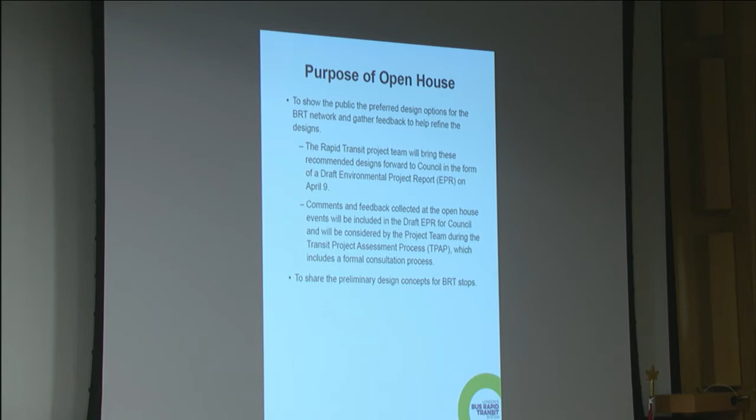We're compiling the comment sheets from these open houses, and we'll be including them as part of our presentation to council in April as part of the draft EPR. As far as how those sessions went, I'd say the tone was very respectful, and the questions and comments we got were very constructive. So we're really happy with how those sessions went.

We've included a timeline—this was a board we added to our collection for the last open house, really to give people a sense of where we've been and where we're headed. There's still a lot of work to do on the EA into detailed design, before we even get to the construction phase. A lot of people are always asking us, well, when are you going to start construction and where are we now? So we wanted to put something together that was easy to digest and helps people understand where we sit today. I'm not going to go through it in detail, but all of these boards are available on the SHIFT website if people want to dive deeper into some of the details.

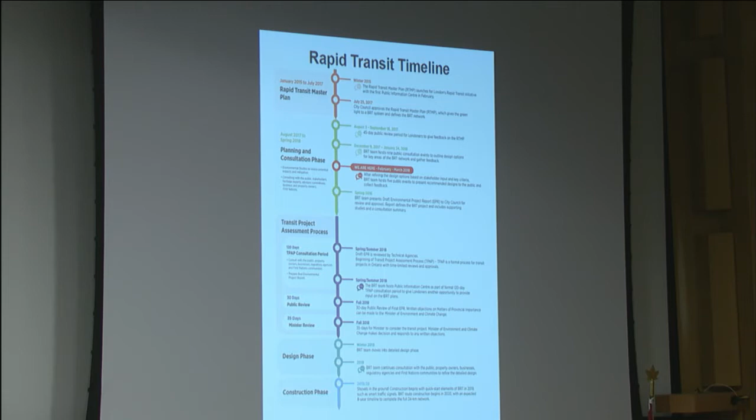We touched on some of those core key messages around our project and citywide benefits, like a 35% increase in transit service, reduction in greenhouse gas emissions, some of our reduced or deferred road widenings that can be pushed off because of doing this project, how many people will be able to walk to work or home from a BRT route or stop, and the fact that we're revitalizing 24 kilometers of our city roads with this project.

We spent a lot of time—we always go back to the basics when we have our sessions—on what is bus rapid transit: the idea of dedicated lanes and how that brings the reliability and frequency of this service, how we're able to make better connections with local service, integrating our local service with rapid transit to improve service citywide, and also the fact that as part of our project, we're implementing smart traffic signals, which will help reduce congestion and smooth traffic flow across the city, whether you're on an RT corridor or not.

We also like to touch on some of those other core features about bus rapid transit: modern design features, the fact that our buses and BRT stops will be accessible, with real-time information, attractive shelters, and good pedestrian and cycling connections for your first and last mile, whatever your situation is, integrating those designs into the neighboring communities.

We talked about our two corridors, where they go, the two routes, the northeast route having a 5-minute separation between buses and the southwest having a 10-minute headway on buses.

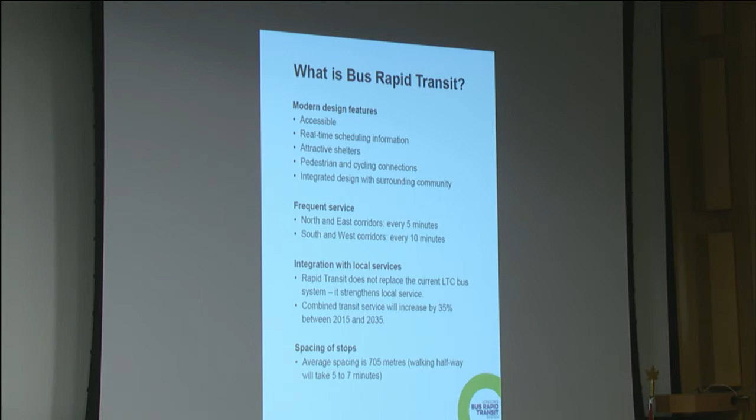We touched on local service integration, that ability to reinvest service currently on those RT corridors into other areas of the city, allowing us to bring more buses to more places more often. So we're improving service to areas that may be underserved or not served in the periphery of the city by redistributing that resource.

We also talked about stop spacing, and the fact that with BRT we're running essentially an express type service where we have larger spacing of BRT stops. On average it would take you about 5 to 7 minutes to walk to a BRT stop if you're standing as far as you could at the midpoint between two stops.

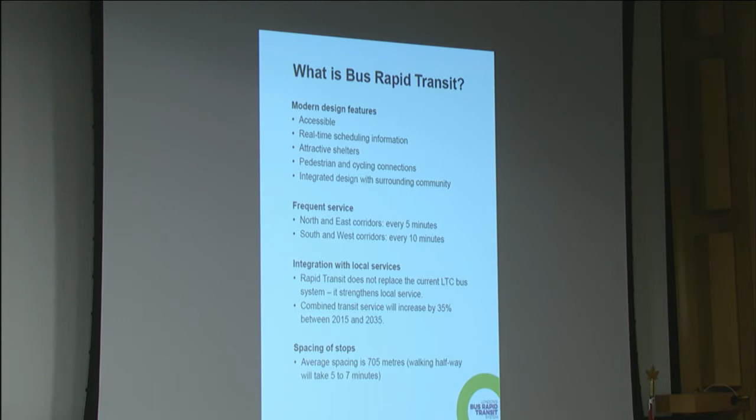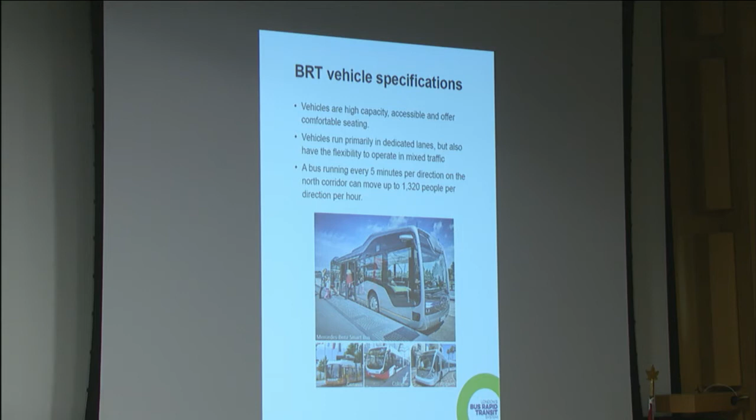We talked about our BRT bus specifications. We're currently going through a study with CUTRIC, a group that looks at bus technology, to review what our technology will be, whether high-efficiency diesel or electric. But the idea is that our buses will be modern, high-capacity, fully accessible, with comfortable seating. They'll run primarily in dedicated lanes, and a bus running in a dedicated lane at a 5-minute headway has the capacity to carry almost 1,300 people per hour in one direction.

Touching back on some of the consultation we did in December and January, we had 9 sessions in total to allow the public to comment on the different design options for configuring routes along our BRT corridors. We had almost 800 attendees at those sessions and 267 written comments, plus a lot of discussions around the boards, which was great to hear. We continue to get comments via email, and we had a different session with surveys where people could comment on the stop features they'd like to see at BRT stops. So there were lots of ways people could feed into this process.

I wanted to touch on how we arrived at our recommended design options. Each of those design options is rooted in the basic core principles set out through the Rapid Transit Master Plan: city building, community revitalization, transportation capacity and mobility, operational viability, and fiscal responsibility and affordability. Those were our overarching principles.

In addition, we had over 25 different technical criteria around environmental and cultural heritage issues, among others, that we had to balance in determining our preferred options. And of course, public and stakeholder input was also critical in how we got to the recommended designs we're presenting today.

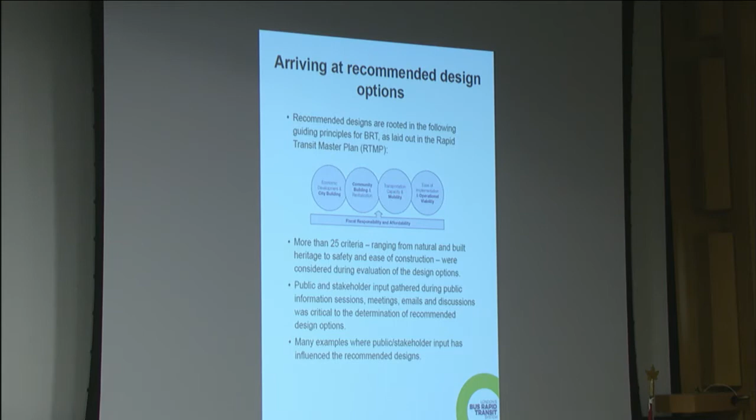At our previous session, we identified 9 key focus areas where we were looking at different options or alternatives for how to configure the BRT routes. Those are listed on the screen. So we're looping back on each of those areas at our current open houses from last week to say what was the recommended design in each area, and we also provided some early concepts for our BRT stop designs.

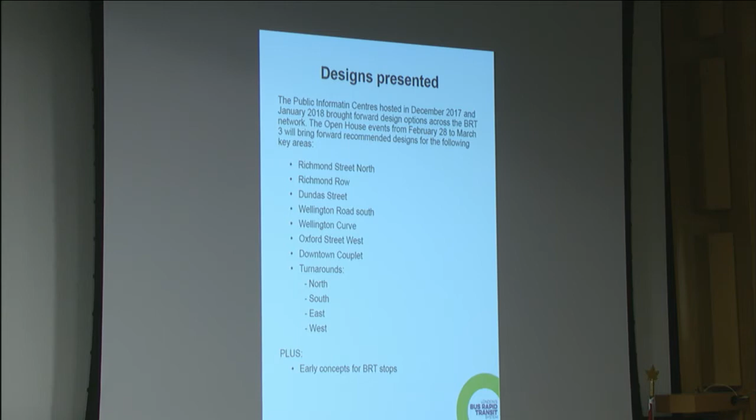That's the end of the preamble. I went through it a little quickly because I know we have a lot to cover in terms of the actual recommended design options. But the information is all available on our website if people want to go back and look at it in more detail.

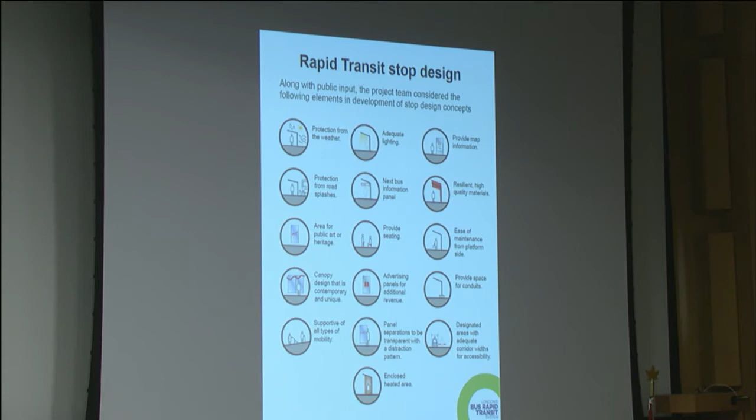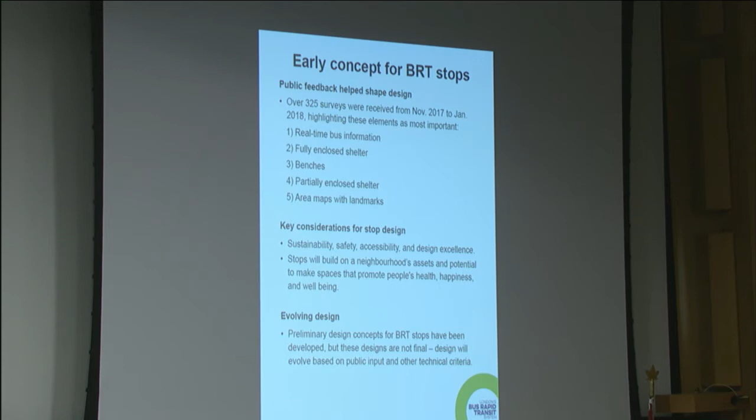Next, I'll walk us through some of the information we presented about rapid transit stop design. This board gives an example of some of the many features we've considered that will be part of our designs going forward. We had a public workshop on stops and streetscapes back in mid-November, where we asked the public what features are important to them for these stops, and how we should work to fit those into the surrounding neighborhoods.

So things we heard from the public in terms of priorities: real-time bus information, fully and partially enclosed areas within those bus shelters, benches, and those comfort sort of features that are important to people. That's what we saw float to the surface in terms of key features they were looking for.

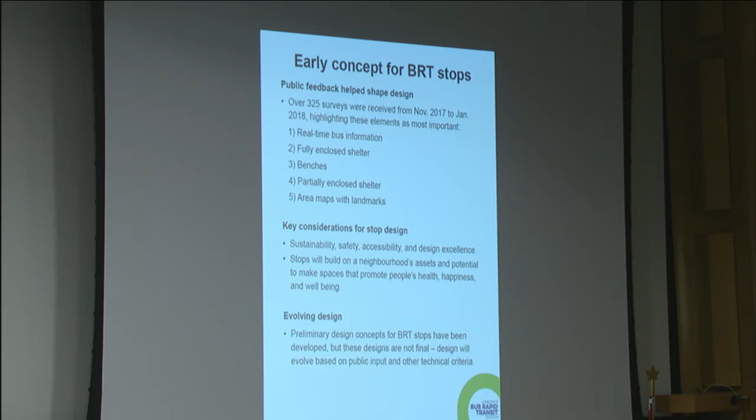We also heard a desire to make sure the stops we design are sustainable, safe, and accessible. People were really stressing the importance of having design excellence in those and how they fit and integrate into the neighborhoods. We also wanted to talk about how these designs will evolve over time.

So we have some early concepts, and we were trying to determine what our needs are from an EA perspective - what are the widths of the sheltered platforms, where would we put passenger information, maybe ticket vending, offboarding and onboarding areas, those enclosed areas we talked about, and making sure they were fully accessible.

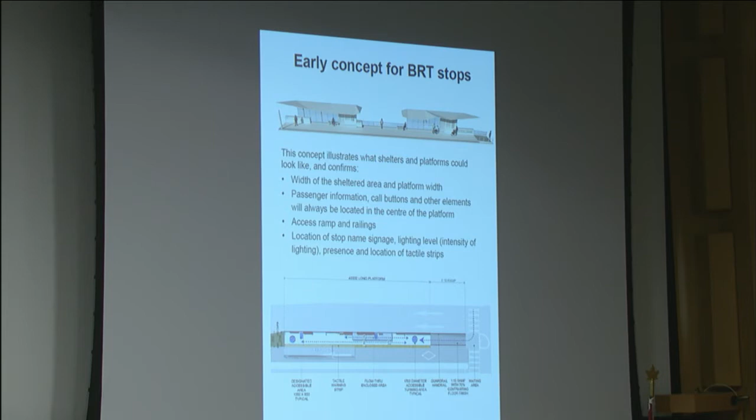And again, these designs will evolve. As we move forward, the intent is that BRT stops will be recognizable as a BRT stop across the city, but we can still customize them to fit into the neighborhood - things like materials, colors, finishes on the platform surface or the walls. I'm looking for opportunities to integrate art or information that reflects the cultural heritage or history of a given neighborhood, but essentially that canopy length and size and those key features will remain consistent.

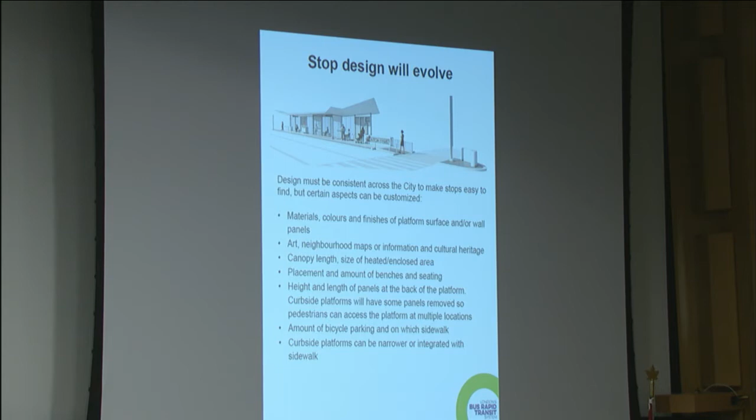Going forward, we want to engage Londoners and make that a fun process on a neighborhood by neighborhood basis to engage people in what these stops will look like. One thing I noted at each of the presentations last week is that I promise we are not going to build 38 beige stops. This is really a blank canvas for what the stops will look like when we move forward.

So with this, I thought I'd start moving into the corridors. I'm going to take us through our recommended designs, corridor by corridor. We'll start with north and then move our way around the RT routes. For each of those 9 key areas, I'll walk through our recommended design, what we heard from the public at our different sessions, and the reasons why we recommended that design.

So for Richmond Street North, from Oxford to University Drive, we're recommending 2 center running BRT lanes with 2 lanes of general traffic, one northbound and one southbound. Things we heard from the public included a desire to minimize the impacts to trees, driveways, and properties.

We had mixed opinions on curbside versus center running depending on perspective. I think in most cases, when we took time to talk to people about center running and how it works, and helped them understand how you get to the platform and how that system would operate, a lot of people really came to see the benefits of a center running system.

We also heard concerns from the public about how traffic would be impacted by this proposed design. Again, that's something that we looked at, and so we recommended this design.

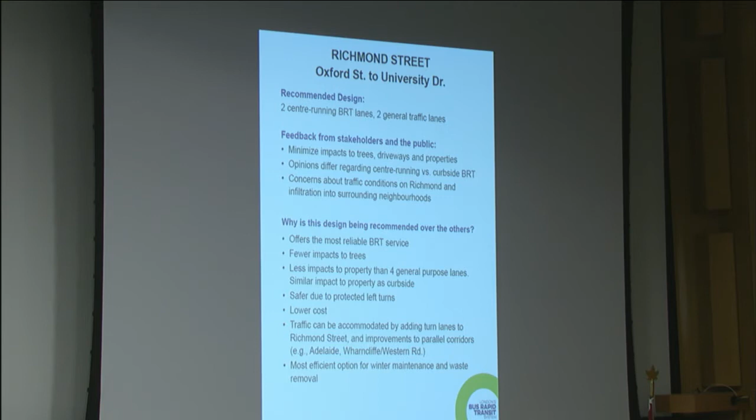It provides the most reliable BRT service. Center running is always going to give you that most reliability because those lanes are protected from any vehicular traffic crossing through them except at signalized intersections. So you maintain that true dedicated lane that allows for reliability and the ability to provide increased frequency.

This design option has fewer property impacts - fewer impacts to trees, and fewer individual properties affected. We've noted, and heard from other municipalities as well, that a center running system is safer due to the ability to provide protected left turn lanes at those signalized intersections. This design was also the lower cost of the different options.

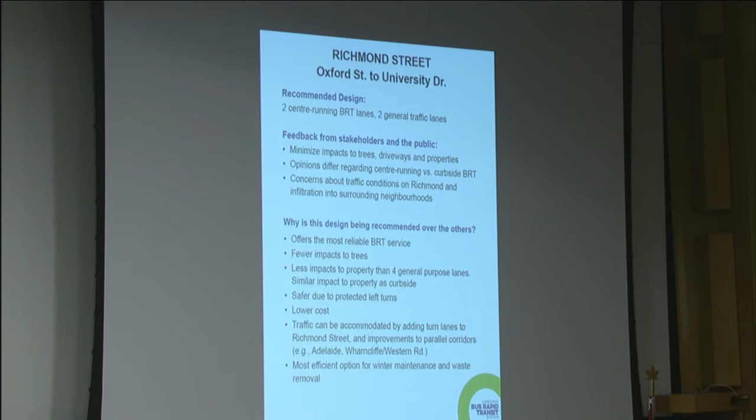We also did some modeling, which I'll dive into a little deeper, but we showed that through parallel improvements on Adelaide, on Western, Wharncliffe, and through the campus, we'll be able to accommodate the traffic that will be on Richmond with those improvements, as well as providing other turning facilities and bus bays along Richmond.

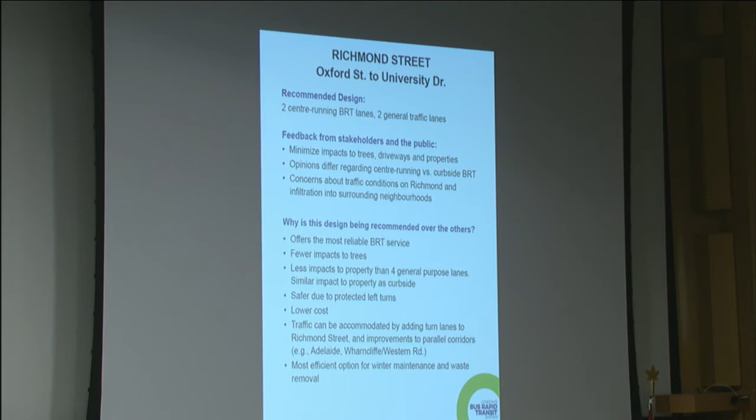One other point is that center running is the most efficient option for winter maintenance and waste removal. So those factors played into our decision to go with this recommended design.

This is the cross section we're showing. In concept, you can see we have our center running BRT lanes down the center of the road, separated by a 1.5 meter wide concrete median about curb height. It's not a tall barrier like some people thought—just a curb height median like you'd see on any separated road.

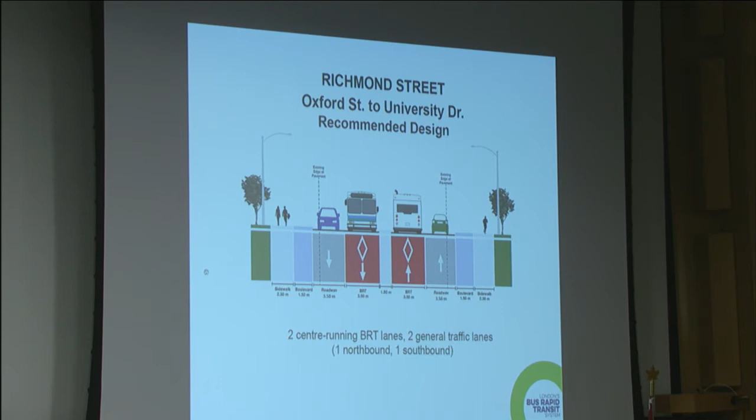So we've got our 2 center running lanes, median separated, and then 2 lanes of general traffic, one northbound, one southbound, a boulevard area, sidewalks, and additional space for trees. As we get into detailed design, we'll be working in this area to mitigate impacts where we can and try to keep our tree impacts down as well.

I mentioned I'd dive a little deeper into some of the traffic modeling we did. We wanted to demonstrate how traffic would respond to the changes we're implementing and recommending through our system. To do that, we needed to look at the entire traffic area from the north, so we modeled using a computer simulation the area from up near Masonville right down to south of Oxford Street.

The goal was to capture all of the parallel improvements happening in the area. Some examples are removing the bottleneck on Western Road where the rail crossing bridge work is underway right now. We're also planning, on Adelaide Street, to advance a grade separation or underpass of that rail system, which will again remove a bottleneck and make Adelaide a more amenable option for people coming from the northeast down towards the corridor.

Another parallel change in traffic patterns going forward is that with Western's master plan for their campus and open space plan, they are planning a car-free scenario on campus. Also, when we bring BRT through the campus and over University Drive, there will no longer be vehicular traffic cutting through the campus from that area. That again is going to affect the volume of vehicles traveling on Richmond.

We then combine that with the fact that, as part of our design, we'll be incorporating right turn lanes and left turn lanes at all signalized intersections and side streets. Where local service feeder routes are feeding people into the BRT corridors on Richmond Street, they'll be stopping in bus bays so they're not bogging down the through lane of traffic. So essentially we were providing one lane of general traffic in each direction, but that lane will be unencumbered by the many things that bog down Richmond North today.

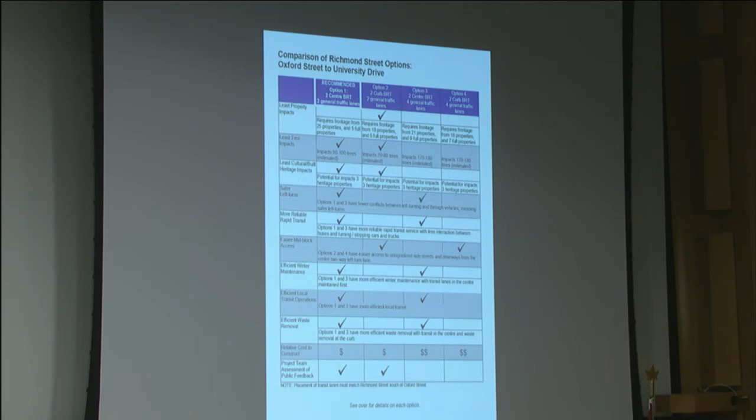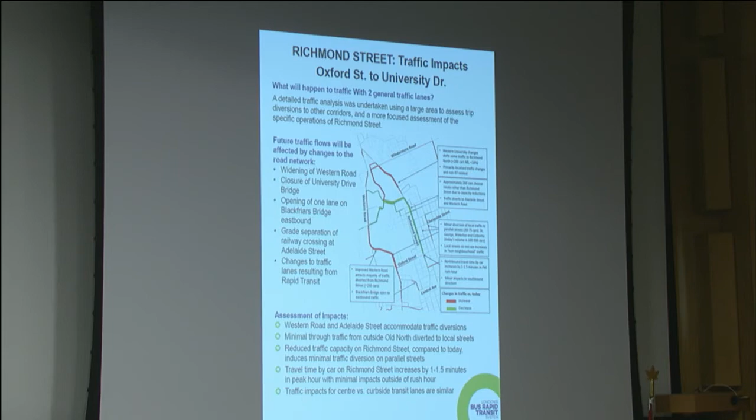Okay, I'm going to move forward. Let's head south down Richmond Street and now talk about the portion of Richmond from Central Avenue to Oxford Street West, which would basically be that Richmond Row area. In this area, we're again recommending 2 center running BRT lanes with 2 general lanes of traffic.

We heard from the public concerns about pedestrian and cycling safety, traffic capacity reductions, and on-street parking and loading areas, which was important for the businesses along this stretch of Richmond. We need to address business impacts during construction, which is something that as we move forward with our project, we'll be having strategies and communications plans for how to manage construction when we work through these busy commercial areas.

We had questions about the distance between BRT stops, and we also had questions about how we'll be managing the crossing at the rail at the CP rail crossing there and how we'll deal with potential conflicts with trains.

So in terms of the reasons we recommended this option, again, it offers the most reliable BRT service. We are separating BRT from those curbside activities that are common in this type of Main Street area.

We've also looked at the potential to accommodate some on-street parking and loading areas in the form of bays. With the center running option, we were able to maintain on-street parking along Richmond Row, as well as some loading bays. With the curbside scenario, those would have been gone with the buses running along the curb lane.

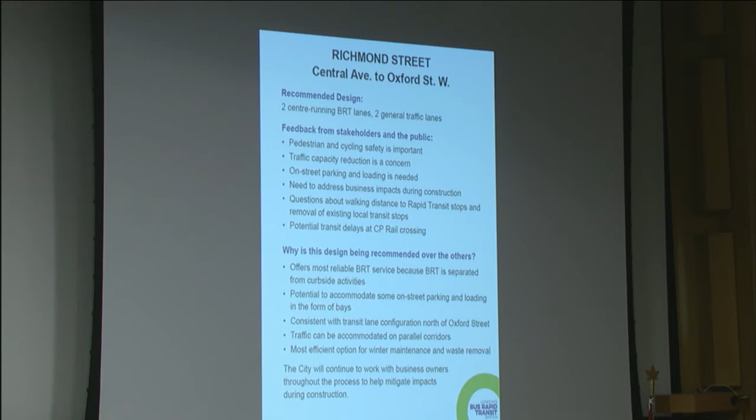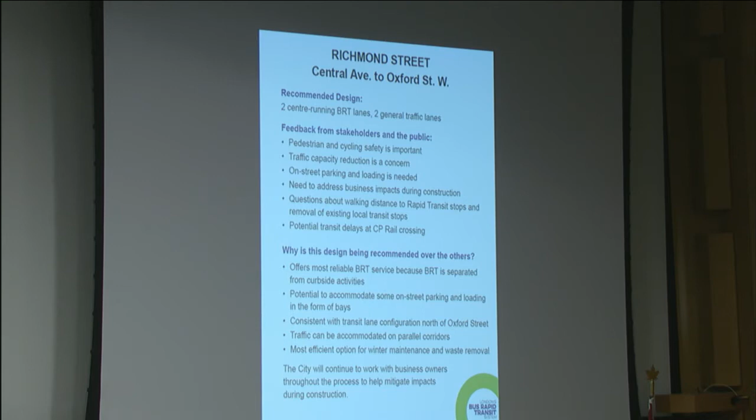We've also noted that traffic can be accommodated on parallel corridors. We have a grid system to the south, which allows other ways for people to access businesses along that section of the route. It's also the most efficient option for winter maintenance and waste removal, and center running is a safe option as well.

So here's a cross-section for the Richmond Row section. We've got center running separated by that curb-height, 1.5 meter median. Just to stress again, the reason why that median is important to center running BRT is...

If we didn't have that there, inevitably people trying to make left turn movements would use those BRT lanes as a shelter or refuge to wait for an opportunity. We'd have cars stopped in those lanes, buses stopped, and all of a sudden our system isn't rapid anymore. So we need to maintain the integrity of those BRT lanes, which is why we have that center running median, but then we offer left turn opportunities at the signalized intersections.

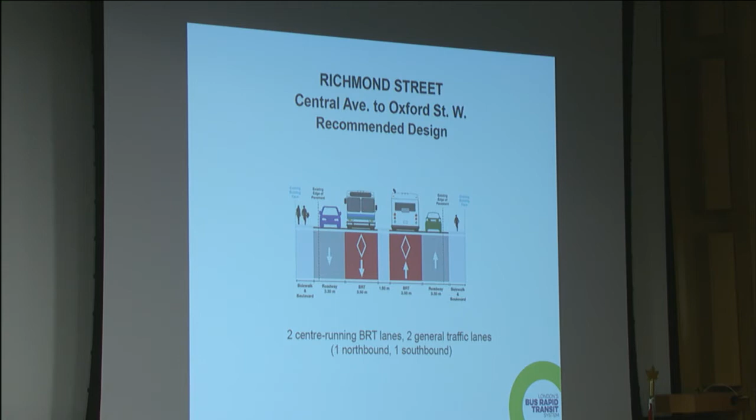So I'm going to flip over to the other side. Here we go, and I believe, do I have another rendering? Nope, that's the Wellington South. Okay, we'll go back over here.

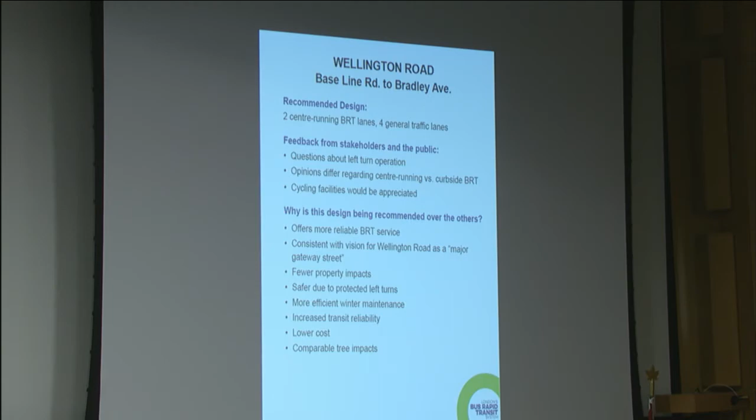Okay, so that was a summary of the Richmond North. I'm not sure, did we want to take questions corridor by corridor as we go and take a breather to see if there's some things I can answer? I think that's the best way to do it, it's such a big presentation.

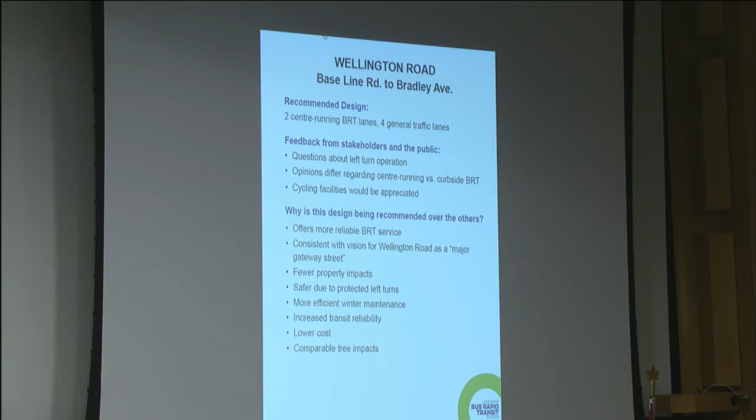With center running, we'll be able to allow priority signals at each intersection where people making a left turn or U-turn to loop back and hit a mid-block access can do so on a protected signal, where only the left turn and U-turn movements have control of the intersection.

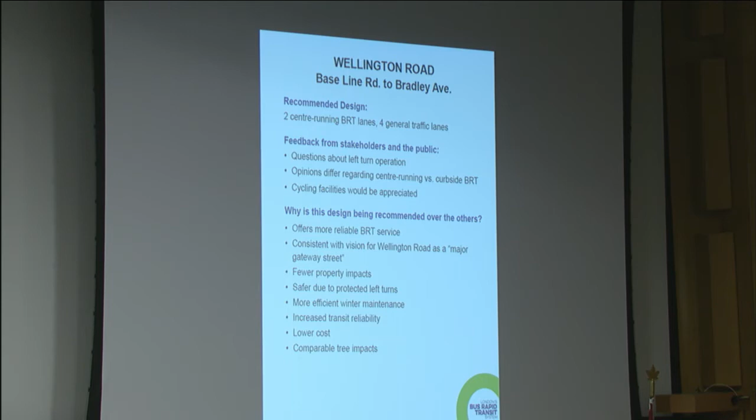This brings mid-block left turns together into a safe, focused area. We've seen in places like North York an actual reduction in accidents along center running BRT lanes because of how the turning movements are brought together into one safe location. It's also more efficient for winter maintenance, has increased transit reliability, lower cost, and tree impacts for both center and curb running were comparable in this scenario.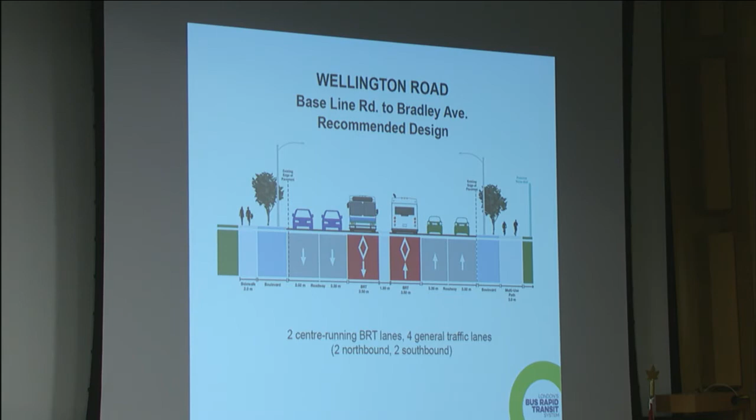Next I'll walk us through the Wellington Curve, the area of Wellington from south of the Thames River to Base Line Road. In this area we looked at 3 options, trying to balance the impacts of widening this road to maintain 2 lanes of traffic in each direction. In the end, we looked at widening to the east, widening to the west, and straightening out or lengthening the curve, which is currently below design radius.

That's why you often see trucks hopping curbs or people floating out of their lanes a bit when coming around that corner too quickly. Our recommended design is to straighten or lengthen out that curve to get it closer to design radius and improve the safety.

What that also does is it balances some of the property impacts a little bit on the east and a little bit on the west. What we heard from the public was requests to minimize impacts to St. Andrew Memorial Church, and questions about the city's process for addressing property impacts, because we are impacting some properties quite significantly in this section of the corridor. We had differing opinions on which way to widen, east or west, and our recommended design balances that between the two sides.

People did comment that the curve is currently not to standard, and they noticed it. So why we recommended this design: we're making traffic safer by increasing those horizontal curves, and also providing protected turn lanes as we are in other parts of the corridor with center running.

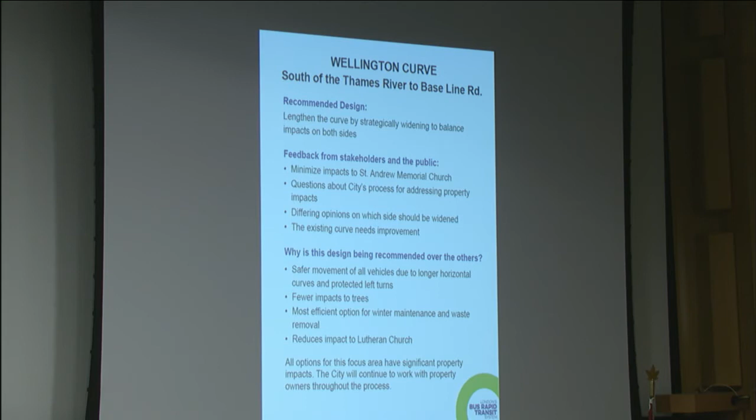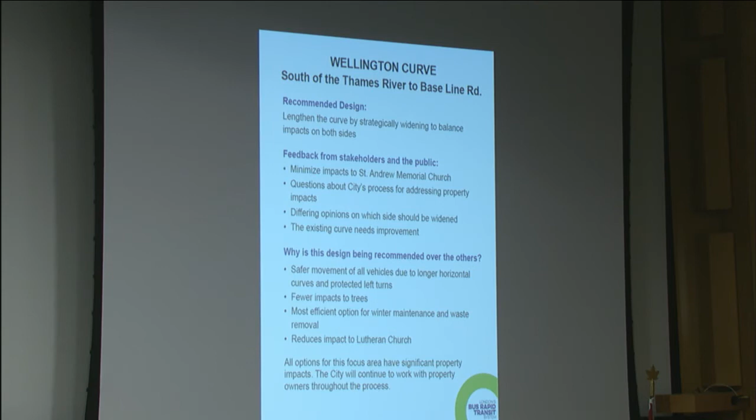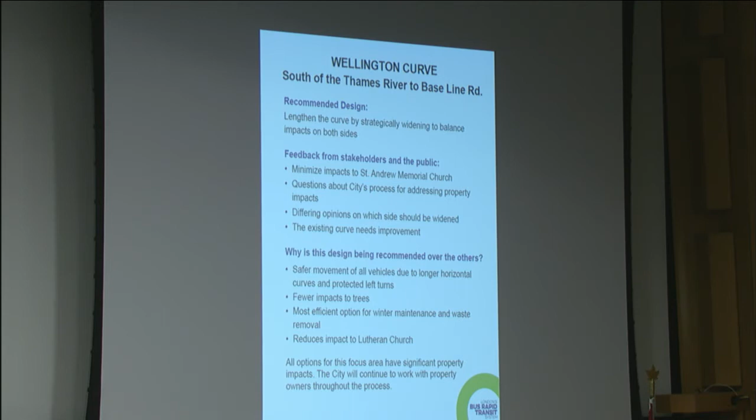This option had fewer impacts to trees, and it's also splitting the difference from a grading perspective. For those who know Wellington Curve well, there's the Anglican Church as well as the Lutheran Church right in that corner. Redeemer Lutheran Church is already sitting on a bit of a retaining wall, and if we widened more to the west on that side, we would have impacted that, driving it back and requiring a significant wall to match grades on that side. So we're balancing property impacts, grading impacts, and tree impacts to try to thread the needle through this section and find the best design we could.

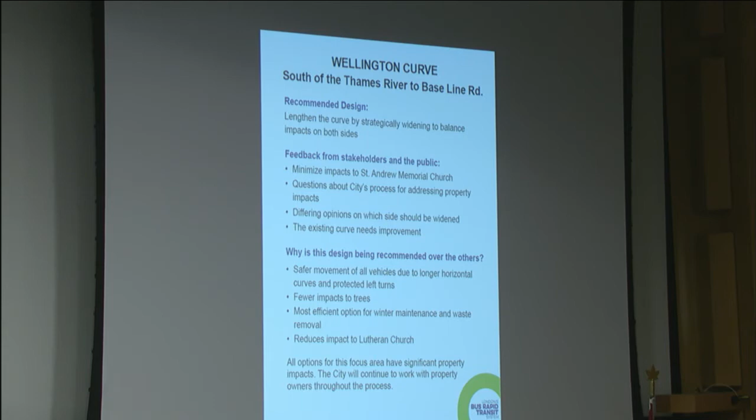Here's another cross-section for Wellington Curve. It's really the same cross-sections we saw to the south, but this example shows what a cross-section would look like through an intersection, with some turn lanes. We've got our two center-running BRT lanes separated by a median, and a left turn lane to one side, so at a signalized intersection this is where people would have the protected ability to make left and right turn movements.

Is that me? I'll just pause a second till we get our screen back.

There's the left turn, and what you see at these left turn intersections at a signalized intersection is almost a shadow area on the opposite side, which balances the left turn coming from the opposite direction of traffic. Those are areas where we can look for opportunities to include landscaping in the corridor. We then have our two lanes of general traffic, northbound and southbound, and our sidewalks again.

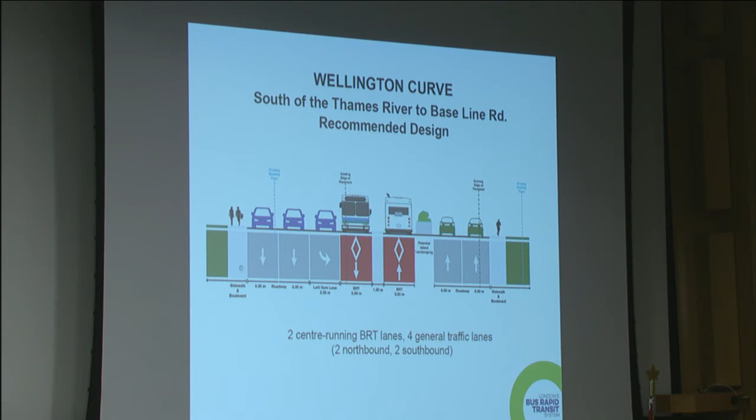For the south turnaround, we've recommended combining the platforms for rapid transit and local service at the White Oaks stop. I had a rendering earlier showing the last BRT stop, which is an on-street BRT, and I'll point to it on the map here. We've got White Oaks Mall with the BRT stop located on the road out there. One of the things we're doing in this location is consolidating the local service and the BRT to make transfers at that stop. Because those buses, both local and RT, will continue southbound through mixed traffic to turn around and head back north, it makes sense to bring them together at that center-running stop, so people can disembark from a local bus, wait for their RT bus, and continue on to their destination.

As far as turnaround options, we've shown two options in this area. One is an on-street option where buses continue in mixed traffic down to Holiday Avenue and use an existing signal located at the Old Navy Plaza. That allows buses to have a bus-only signal to turn them around and head back north. We'd be looking at including a driver facility in that location, as our sort of interim, implementable option using existing road allowances.

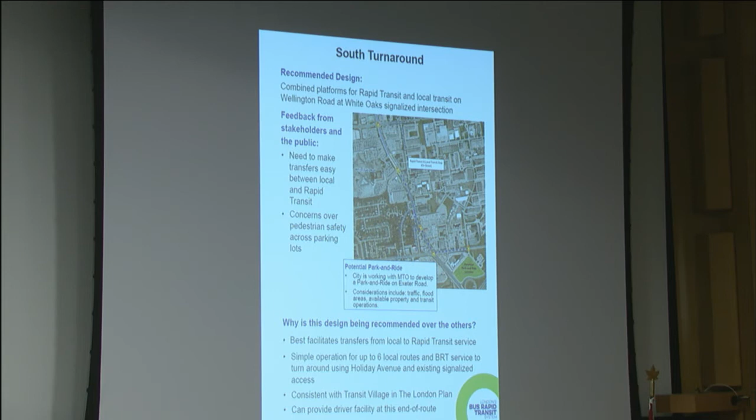We've also been working together with partners down near Exeter Road, next to the OPP dispatch, to look at options for a park and ride. That's something we're still considering. We're working with MTO, Hydro One, and we own some land in that section to look for options that could come to fruition, where we'd be able to turn the buses around and also have an area for people to park and get onto the system.

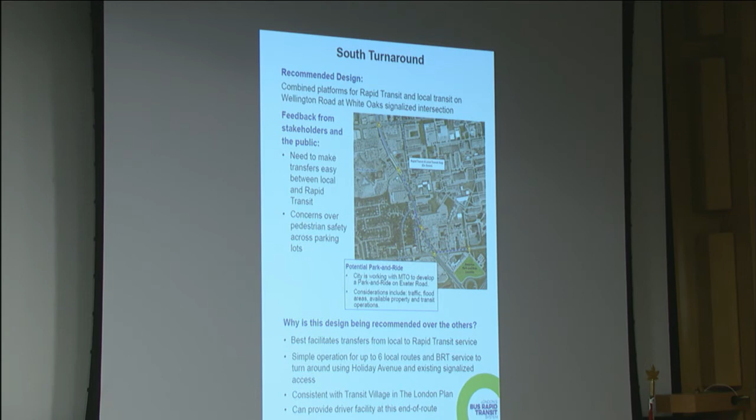If the chair would indulge me, just a question. I'm a little confused - was it 1.8 meters between the median between the two RT lanes? Is that right, or 1.5? And at the point where there's a platform or a stop, I would assume that's wider than that. Would that not be true, or is it adequate with 1.5?

It's not even 8 feet. Sorry to use the imperial.

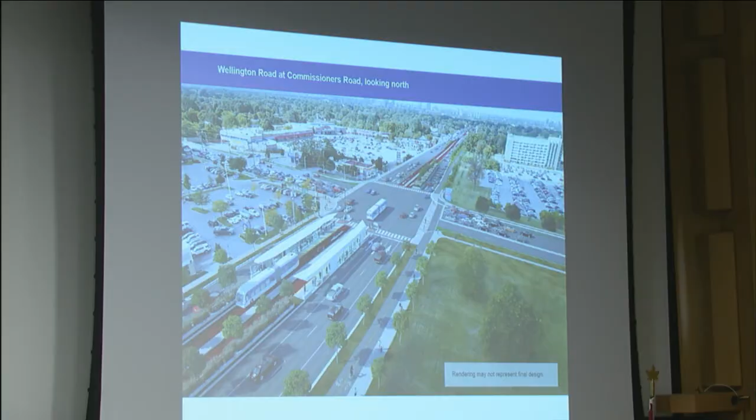Okay, any further questions? Councillor Van Holst? Thank you very much. Just a comment about this particular intersection. I had some discussions with residents today about the crosswalk buttons, and we might have to make a little change here regarding those.

I do really like the center lane running when it comes to the ability for a resident to get across the street. If people are slow moving, the opportunity to take two cycles to get to a middle safe place and then continue is great, because that's a long distance to travel. But I understand with this intersection, if you were at the gas station and wanted to cross over to the property on the southeast, you would hit the button, but by the time you got to the southwest corner you'd have to wait another cycle to push the button. It doesn't always give you a pedestrian light to cross, so I'd assume that would be the case here.

But I know people have said they tried to hack it - they would push the button at the gas station, and then just before they crossed, push the button to go across Wellington as well. When they got to the other side, it was only the pedestrian signal on the north side that was available to them. I'm sure those will all be timed out, but it seemed to me that's something we'll have to look at as well.

So here's a cross-section for Oxford Street West, with 2 center-running BRT lanes. We have a 1.5 meter median running down the center, 2 lanes of general traffic in each direction, and sidewalks on both sides with some room for the boulevard. As you can see, we get pretty tight through the section from Platts to Wharncliffe Road, and we are impacting some properties in this area.

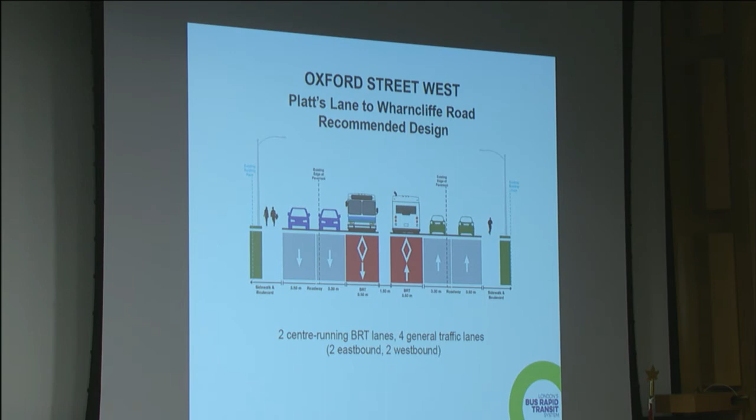Okay. I didn't have a rendering for that.

I'll move on to the west turnaround. This is another example of how we'll be going from mixed traffic past the last stop of the BRT. Dedicated lanes will end at Wonderland and Oxford with near side stations, I believe—actually, I'll double check the rendering on that. I'll see if I can.

Is it possible to switch over?

If everyone can see that rendering on the screen, there's a rendering of Wonderland at Oxford. We've got far side stations, these are the last BRT stop along the west leg of the corridor. Beyond that, if you look to the west, you can see the fire hall there, and we've opened things up to allow for access to the fire hall. Then those dedicated lanes taper out and the buses enter mixed traffic to continue westward to the Capulet Lane turnaround.

And if we can flip back again.

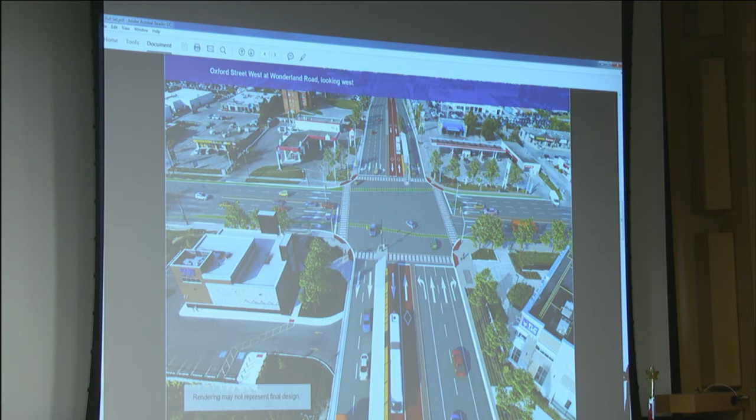In this screen, we can see the buses coming from the west to Capulet, and then they'll be able to use what's currently a turnaround for, I believe, the Oxford Express and a couple other routes today, to turn the buses around and head back eastward. We're looking at options to include a driver facility in this location at the end of that leg. This is one of the areas where we've also added an additional stop, because we know there's a lot of high density residential in the area that doesn't necessarily need to walk all the way to Wonderland and Oxford to get the bus. If we have a place where we're pausing the buses anyway, we can let people on there as well.

In terms of what we heard from the public, we heard concerns over noise and air quality from the buses in this area, and we tried to respond by letting them know how our buses will again be state-of-the-art. We're looking at options to have either very high efficiency diesel or electric buses. There was also a desire for people to be able to make easy transfers between local and rapid transit in this area.

Why we recommended this design over others: it offers the ability to provide an additional rapid transit stop, which shortens the walking distance to those existing high-density residential areas. It provides for easy transfers from local service to rapid transit, and it's also a simple operation for both Oxford Express and BRT service, so they're able to focus in that same area. Again, that's what many people in the area are used to today based on the Oxford Express route.

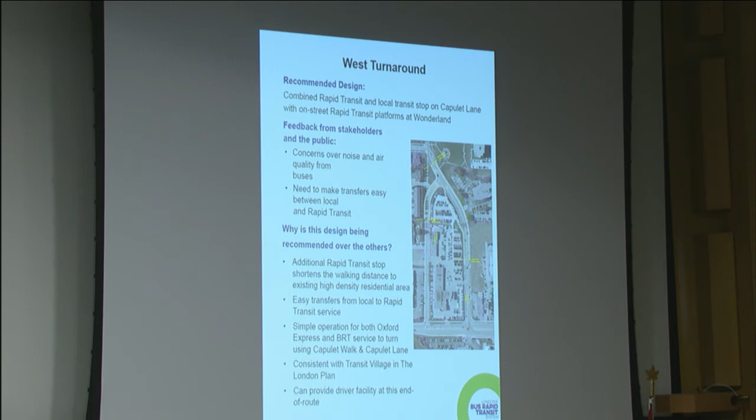This approach is consistent with the transit village description in the London plan and what we're trying to drive in terms of intensification, and it also can provide, as I mentioned, for a driver facility at end of route.

So that concludes the west leg. Any questions on the west leg? Councillor Squire.

There we go. Oh, sorry. Through you, Madam Chair.

One of the areas my ward is interested in, given what's going to be happening with Western Road and the idea that we're going to transfer vehicular traffic off of Richmond onto Western Road, is what's going to happen at the intersection of Oxford Street and Wharncliffe, and what Wharncliffe's going to look like from that intersection until it joins up on the downtown route. Maybe I missed it, but I don't see pictures of that or renderings of that particular area. So I wonder if you could help me with that.

We don't have the specific renderings of that area, but maybe Mr. Soldo, would you like to expand on some of the plans for that intersection? So the drawings for the section on Wharncliffe, from Oxford to Riverside itself, which I believe is, yeah, if you can bring them up.

So they were available at the public meetings. We identified what the improvements were going to be at Oxford and Wharncliffe, and then what the improvements were going to be at Wharncliffe and Riverside.

So at this location, you see the two stations there. The westbound is north of the dedicated bus lane that's on Oxford Street itself. And then the station for the eastbound that will turn down Wharncliffe is there right at the corner in purple. So this is the section where we're looking at running mixed traffic along Wharncliffe itself.

It does provide for a Q-jump lane at that intersection to get the buses through a little bit quicker. But between Oxford and Riverside itself, they'll be running in mixed traffic along the existing roadway, as it looks today, out there today. So that's really the section I believe that you're referring to, Councillor.

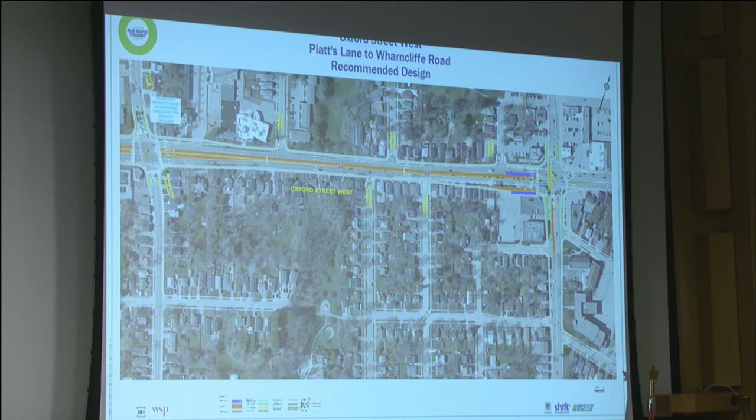Through you, Madam Chair, I'm just wondering, because I haven't got it yet, does the traffic modeling studies that you did take into account, in terms of people transferring over to Western Road, how these changes, the mixed lane, what the impact of that would be on people's tendency to use Western Road?

That's correct. Going back to the larger traffic modeling that Mrs. Ramsey referred to, we looked at a broader area and implementing those solutions, in particular the solution where we are widening Western Road between Oxford Street and Platt's Lane that's currently underway right now. It takes into account that additional capacity, looking at how people would change their travel pattern based on the additional capacity, the closure of the Western Bridge that we talked about previously, as well as some of the other improvements in the area.

And just to conclude, that's information that's very helpful, or will be very helpful to me if I can get my hands on it. Any further questions on this side? Councillor Helmer?

Did we explore the idea of having a station stop at Woodward and Oxford? It looks very tight, so I'm not sure that even would fit. I know that there's one at Wharncliffe and one at Cherry Hill, so this would be very close together. But there are a lot of pretty significant trip generators, one in particular right near Woodward, where a lot of people go. I wonder if there's a rationale for having a stop there, or adjustments, either pulling the station stops back a little bit from Wharncliffe closer towards Woodward, or I don't think you can do it at Cherry Hill, but have you looked at that?

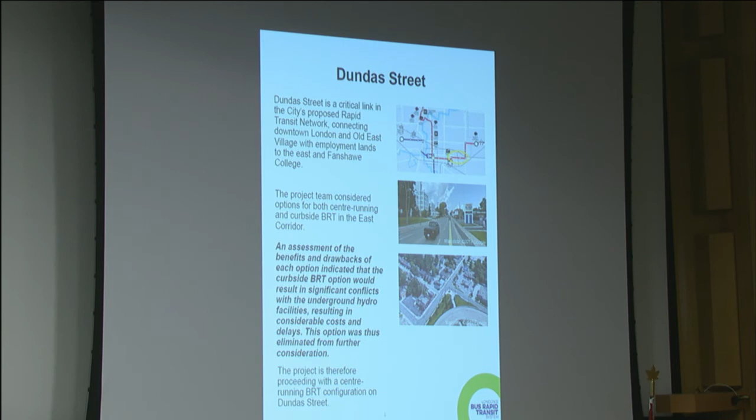So moving out from the east, one of the areas that we presented at our December workshop was the Dundas section. This was one of the areas where we only provided one option, because we had already looked at curbside versus center running and determined that because of major utility conflicts, particularly some hydro ductwork running right along the curb lane, it really precluded our ability to implement a curbside scenario here. So we did present designs for what center running would look like in this area and asked for the public's feedback. We really didn't have an option, but we still wanted feedback from the public.

And then for the east turnaround, our recommended design is to expand the existing terminal on campus with Fanshawe College, and to bring together the local service that's currently spread out in, I think, 3 locations on campus. It'll be brought together in a single hub, again to create that convenience in terms of transferring from local service to the BRT system.

Some of the things we heard from the public and stakeholders was the importance of pedestrian safety, trying to incorporate and work with the campus for any future development in this area, and that transit service to the airport should remain and be improved as we go forward.

That'd be something, again, as part of that annual service review, looking at options. So there's scenarios where you could extend local service from this point out to the airport, or down the road, if demand or ridership increased, you could even look at options to have every third or fourth BRT bus go and mix traffic out. So again, we can continue to look at ways to respond to ridership in that area as it grows.

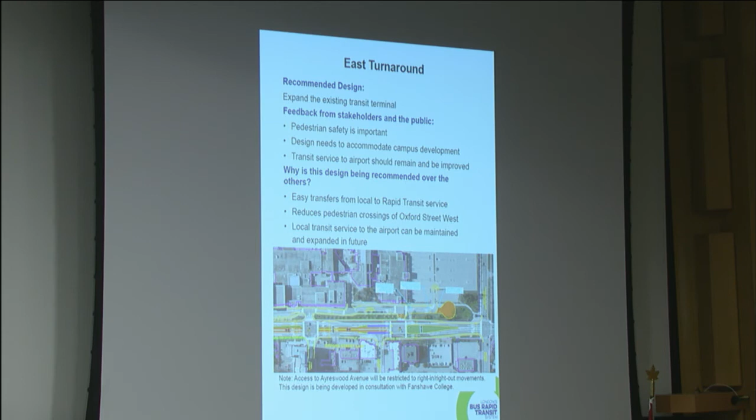Why we've recommended this design: bringing all of that local service and rapid transit together in one location makes for easier transfers from local to rapid transit. It also reduces pedestrian crossings of Oxford Street, so we want to reduce those conflicts where we can. And local transit service to the airport will be maintained going forward.

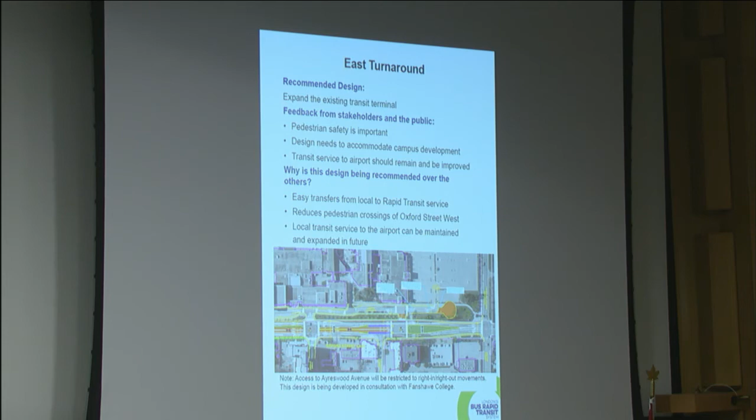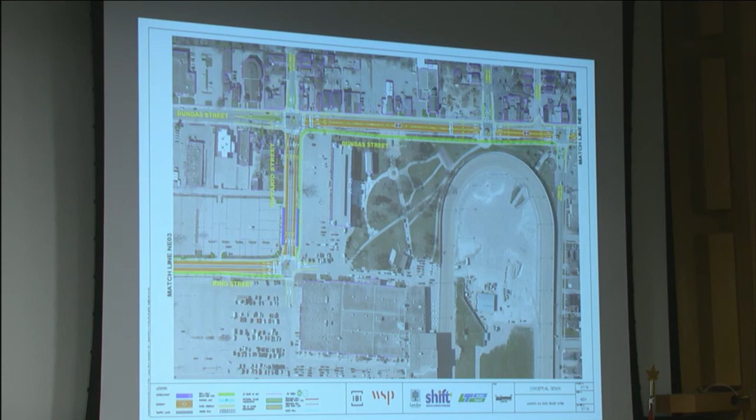And lastly, the couplet. We presented the couplet at our previous sessions, looking for feedback to refine the design. Things that we heard from the public focused around areas where we could try to maintain existing on-street parking and loading areas as much as possible. We'll also be looking at some of those connecting side streets to maybe designate some loading areas so that we can provide for that need.

We did some refinements where we added loading bays, including in front of the Renaissance Tower on King Street, as well as by the City Plaza. So there's certain areas where we've tried to work with the public and business owners in the core to be able to respond to their concerns.

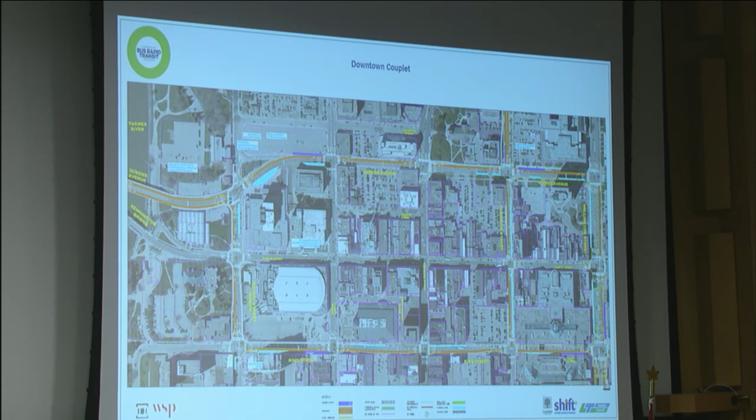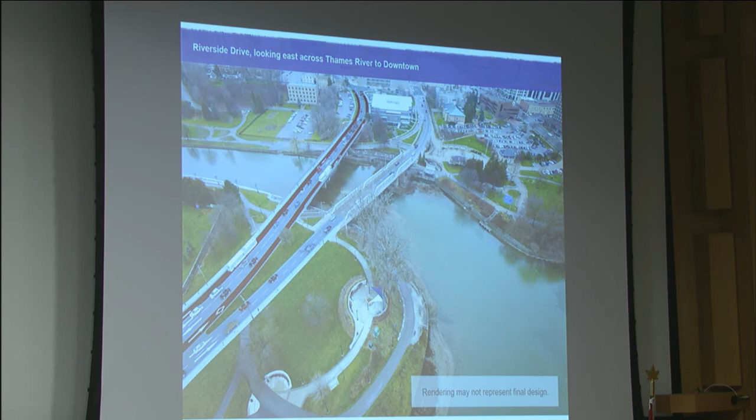One of the things that we heard from the public through our sessions was concern about the ability to make right turns in the downtown with the curb running options. It's difficult to allow for right turns where we have stops, which is at Talbot Street and at Wellington. But one of the things we've incorporated and will be looking at as part of our design is, in areas like Richmond and Clarence, to pull back the bus paint and allow for a shared right turn and bus lane.

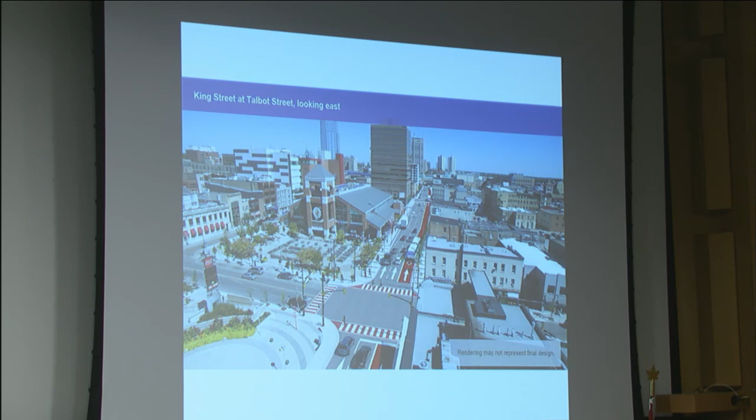So again, it's not like there's a steady flow of buses coming through these areas. People, when they want to make a right turn, will be able to signal their intention to move right and move into those areas. So on those busy nights after a game, or places where there's a lot of people trying to get out of the corridor, we're not going to be restricting all right turns. We want to be able to provide ability for people to move around. So that's something we responded to based on comments we heard from the public.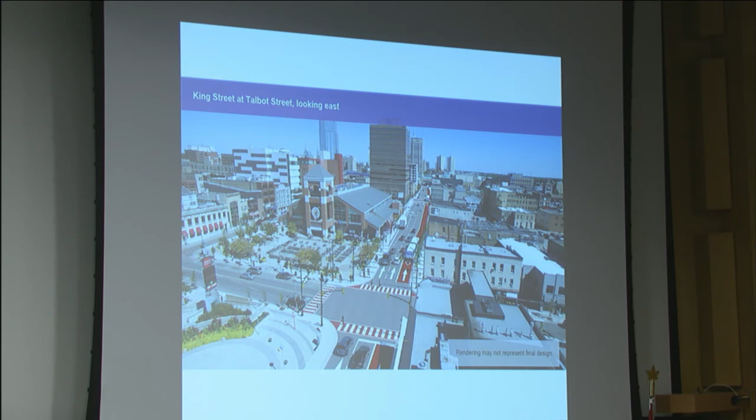Here's a view of King Street and Wellington Street. This is essentially our hub where the two BRT routes come together. You can see that we have two stops in this location, one on the northeast corner, and then a second one tucked in underneath the tunnel on the southwest corner.

These would be those longer BRT stop prototypes I described earlier for connecting routes. These would be 60-meter stops that allow, as you can see in the rendering, a connection where there's a local service bus as well as a BRT bus, to make cross connections between the two services, as well as between BRT routes if you need to transition from the northeast to the southwest BRT routes.

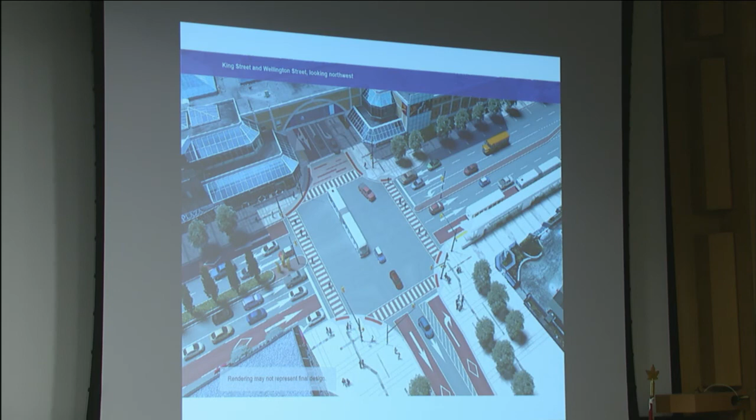Maybe we'll pop back to this and take questions on the west corridor, and then we'll wrap things up, or the downtown couplet, I guess, is what we touched on. Councillor Helmer.

Thank you. So I know that along the east corridor, a number of places there's signalized intersections being added to allow for left turns. In terms of where they were in the initial plan, have any of those intersections moved? Are we still planning to signalize the intersections that were in the drafts that people have seen before?

There are some refinements we're working on right now that we're trying to have ready for our draft EPR we'll be presenting in April. One of those is we've been working with the school board building at the corner of Highbury and Dundas, looking at utilizing a realignment of their access to provide better access for them, and maybe add a signalized intersection while we're at it to allow for additional left turns.

Some other options - looking at this diagram, we've shown Ontario Street going to two-way direction. In some of those areas, we don't have room to accommodate a physical left turn lane, so we'll offer the ability to pull back and hatch that painted line, allowing people who need to make that left turn to signal their intention, check their blind spot for a BRT bus coming through, and then use that as a left turn lane. We want to provide as many opportunities to access the neighborhoods to the north and south of Dundas Street, while minimizing property impacts.

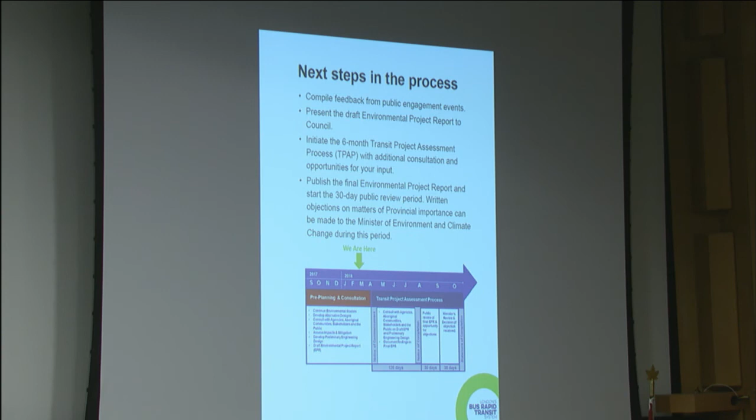Thank you for your patience as we work through all this information. As far as next steps, we'll be compiling the feedback from our most recent public engagements so we can include it as part of our draft environmental project report, which we'll present to council in April. That report will have a summary of the recommended design, plus supporting information and studies we've done, including transit and traffic modeling, environmental impact studies, and cultural heritage and archaeology, as well as a complete summary of all consultation through this phase of the EA.

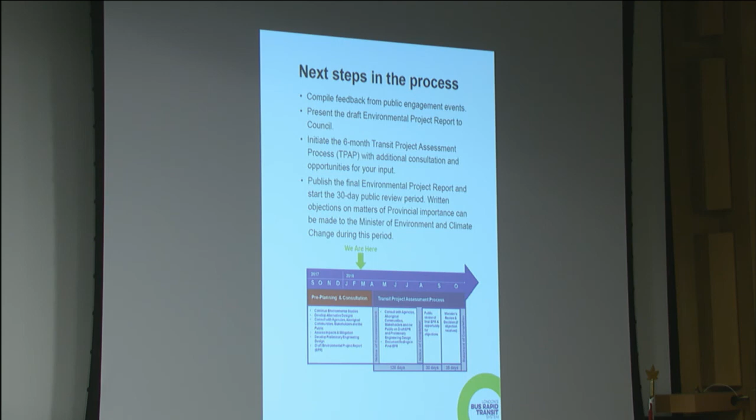That complete report will be brought forward in April as a draft report, seeking endorsement to continue through the EA process into the next stage, which calls for additional consultation on that draft report. So we're not finished — we're bringing forward our complete summarization of what we're recommending so it can go on for further consultation. At the end of that, there's a formal six-month consultation period on a clock, followed by a 30-day opportunity for public comment, after which the Minister of the Environment makes a decision on any comments received, and that's when we'll conclude our EA. We're looking to have that wrap up by the end of this year.

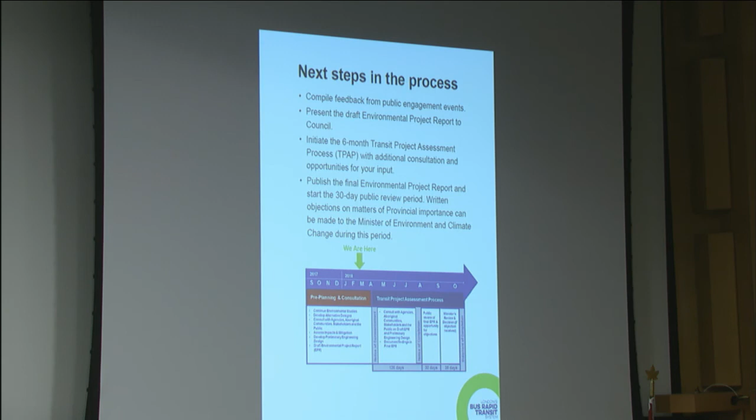With that, I'll close out my portion, and if there are any additional questions, we're happy to take those. Do we have any questions on the next steps in the process?

Councillor Van Holst: Yeah, we talked about the curve on the south route, and I'm wondering if there was a picture of that. Do we have a plate of the south curve on Wellington, showing where that's going to be?

Okay, thank you. And how close is the street going to be to people's front doors? It seems very close. I know there are similar places on Adelaide Street where things get uncomfortably close.